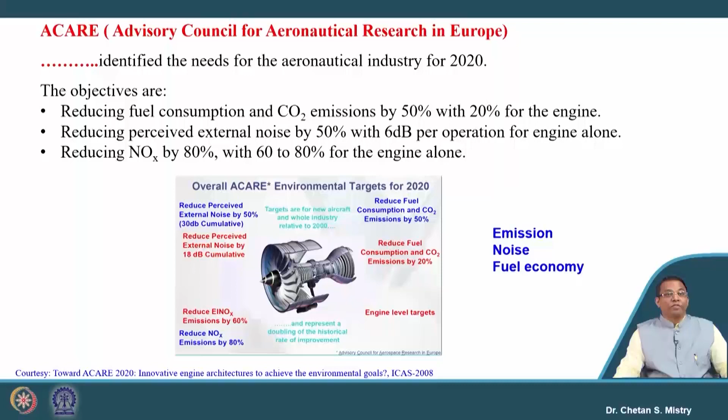We are discussing recent advances in turbofan engines. In the last lecture we were discussing the guidelines given by ACARE in order to meet the requirements in terms of reduction of fuel consumption, reduction of noise, and reduction of NOx emission. The major concerns we were discussing were related to weight, drag, specific fuel consumption, speed, cost, noise, emission, reliability, and safety when discussing gas turbine engine application to aircraft.

Later on, we realized we needed improvement of thermal efficiency and propulsive efficiency because we were concerned about specific fuel consumption. We discussed different approaches to meet that requirement, where we can improve thermal efficiency by improving component efficiency or turbine entry temperature. In order to improve propulsive efficiency, we can address the bypass ratio. We have not yet been concerned with noise and emissions regulation.

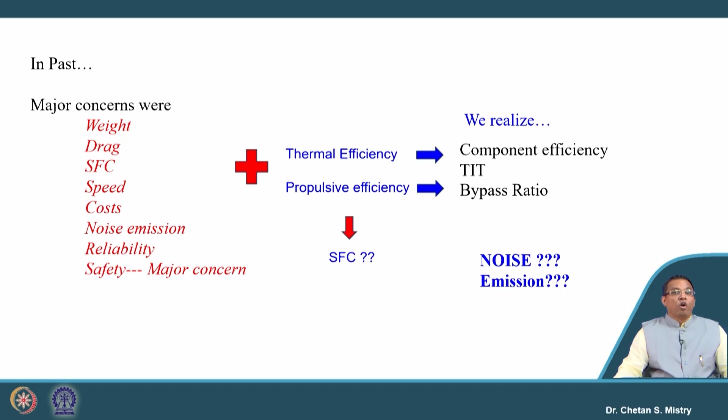There are a lot of companies in US, Europe, and Russia working on development and research activity for engines. Similarly, in the Asian continent, India, China, South Korea, and Japan are working on engine development. But most of the engines we look at are mainly from Western countries, who are investing a lot in terms of time, money, resources, and experience. Let us focus on what projects they are executing to address the issues and meet the requirements given by ACARE.

One such project is the VITAL project, the Environmentally Friendly Aero Engine. This is with the European continent, where SNECMA, Rolls-Royce, MTU, Avio, Volvo, Techspace, ITP, Rolls-Royce Deutschland, and Airbus were all involved. In total there are 52 partners, including university people in this development activity, and 14 European countries like those from Romania, and also CIAM, Russia, were involved in this activity.

This VITAL project is mainly focused on the low pressure part and its installation. So if we look at engine by engine, this project is mainly targeting the low pressure configuration: the fan, the LP compressor or booster compressor, and the LP turbine.

So what they want to do is develop new technologies. First is a new fan concept with the design of two types of fans: counter rotating configuration and lightweight fans. New booster technology is needed because they are looking for high loading with low speed and high speed associated aerodynamics, and developing new lightweight materials. When we reduce the number of stages for the booster, that leads to improved engine weight, which reflects in specific fuel consumption.

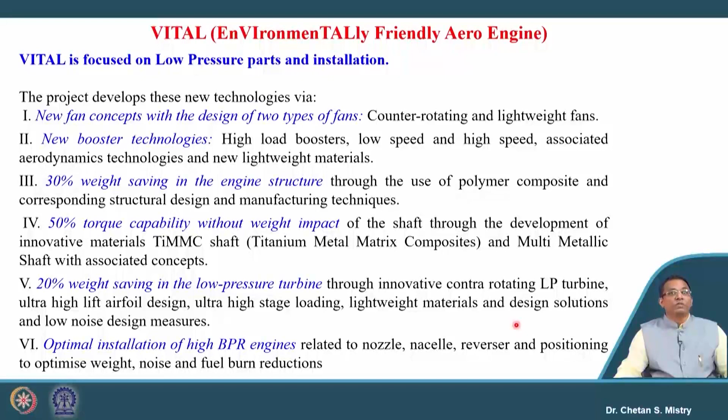Similarly, optimal installation of high bypass ratio engines is related to the nozzle, nacelle, thrust reversal, and positioning of the engine, with optimization in terms of weight, noise, and fuel burn. So this project has many objectives, involving many industries and universities. Let us look at what all they have targeted.

For this project they have targeted three kinds of configurations: direct drive turbofan architecture, geared turbofan architecture, and counter rotating turbofan architecture. The first is related to a ducted fan that is driven by the LP turbine. In the second configuration, the geared turbofan engine, a gearbox is used in order to reduce the rotational speed of the fan.

That is what will be driven by the LP turbine, and we have seen the advantages of using this kind of configuration and the challenges in designing the LP turbines. The third configuration they have targeted is the counter rotating configuration, that is the 3-spool configuration. Here if we look at, this is representing my HP spool.

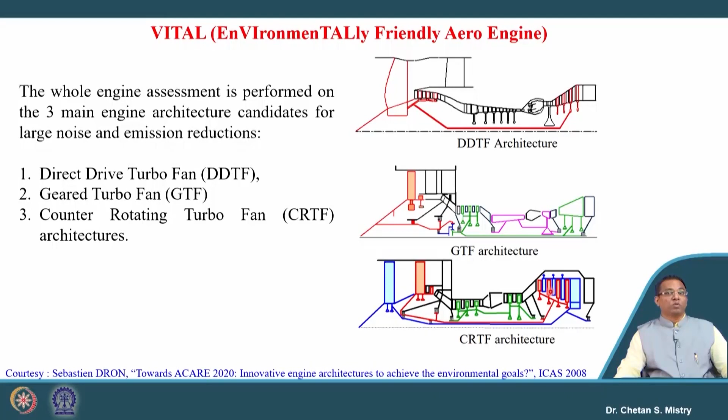In this configuration we are having counter rotating for both the fan as well as the turbine. Let us look at what all they have targeted with. This is the conventional standard turbofan engine, and they want to have two kinds of research for the counter rotating configuration, design 1 and design 2.

For design 1 they want to have the same fuel burn as the standard turbofan engine, but they want to reduce the noise. For this project, CIAM Russia and DLR are involved, and this project, as we say, is the Vital project. Parallelly, they have executed another project with a design configuration where they want to reduce the fuel burn as well as reduce the noise.

In order to address this, the project is named the Dream project. So you can see here, by having this kind of configuration, they want to move towards a reduction of noise, and for that configuration the dimensions are the same as the conventional engine.

Now, if we are looking for this kind of engine architecture with low speed fans, we are looking for load sharing between these two rotors which will be rotating in opposite directions. Then we are looking for a fan diameter that will be lower compared to our conventional engine. The target is also to reduce the noise, which gives the benefit in terms of thrust to weight ratio being as high as possible.

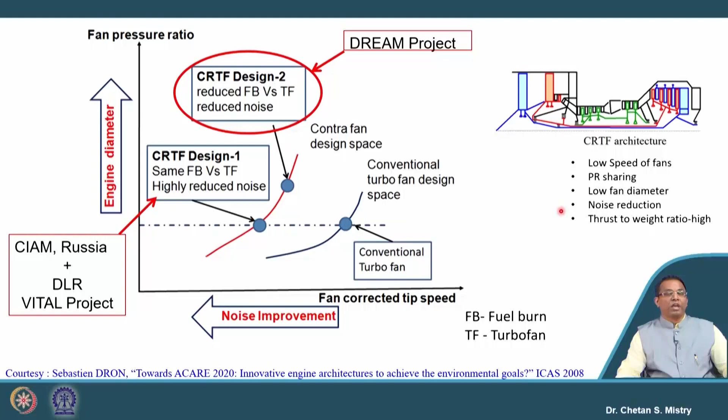Let us look at what all they have done. So these are the 4 research fans. First, that has been developed by SNECMA and CIAM, named CRTF1.

Second, if you look at, this is the single rotor fan developed by SNECMA France. This configuration has been developed by DLR in Germany, and this is the one individually developed by CIAM Russia.

The whole target for doing this research is improvement of performance. Secondly, it is to improve the specific fuel consumption, and the main target is related to noise. Finally, the outcome of the project shows they were able to reduce the noise using the SNECMA CIAM project, and this kind of configuration helped minimize the noise level. At the same time, if we compare the other configurations, they are comparatively noisier.

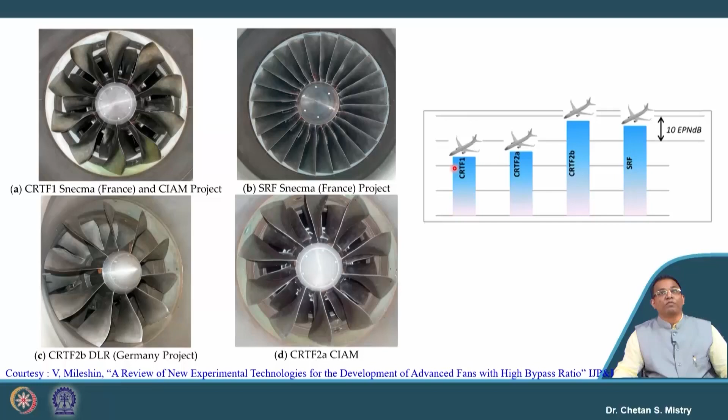Now, this research gave the idea for future engine development. Later on, realizing the potential of this counter rotating turbofan engine, they executed one more project, called the Cobra project, where COMOTI, ONERA, Safran and CIAM together explored the possibility. They implemented this counter rotating configuration for the ultra high bypass ratio ducted fan, and the application they targeted is short and medium range aircraft.

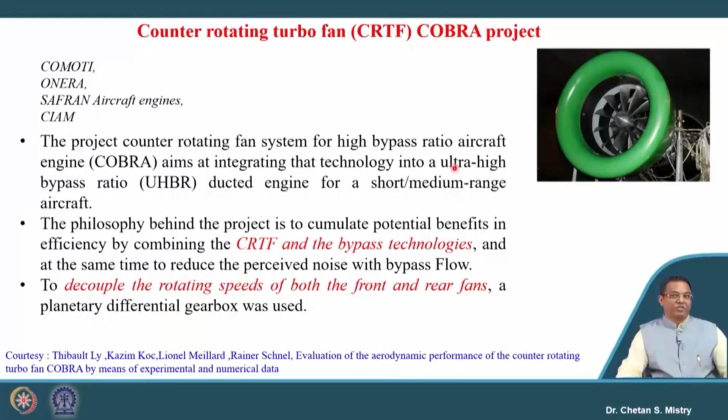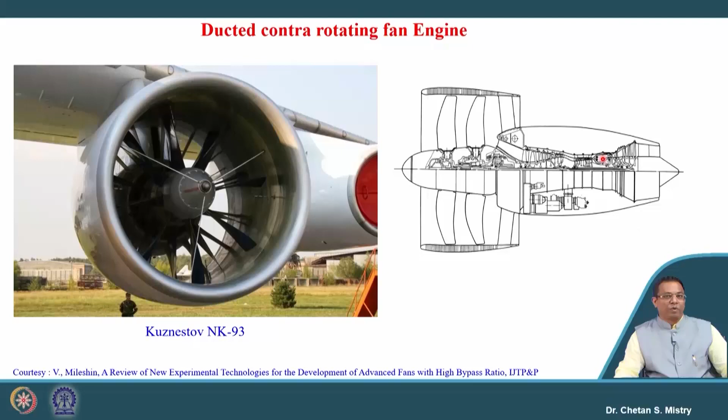Now let us look at the benefits of using this ducted counter rotating fan. Basically the target is to increase the thrust. Here, since we are sucking the air from the front rotor, suppose it is rotating in the clockwise direction, then the other rotor will be rotating in the counterclockwise direction, and that will increase the energy extraction of the incoming air.

If we compare with a single rotor, it is higher compared to our single rotor configuration for similar size as well as power configuration. And when we have this incoming air capacity or sucking capacity to be higher, that is what will lead to improved thrust. Secondly, it will improve the efficiency, because this configuration gives better utilization of the airflow, and that improves the propulsive efficiency, which leads to improved specific fuel consumption as well as overall efficiency of the engine.

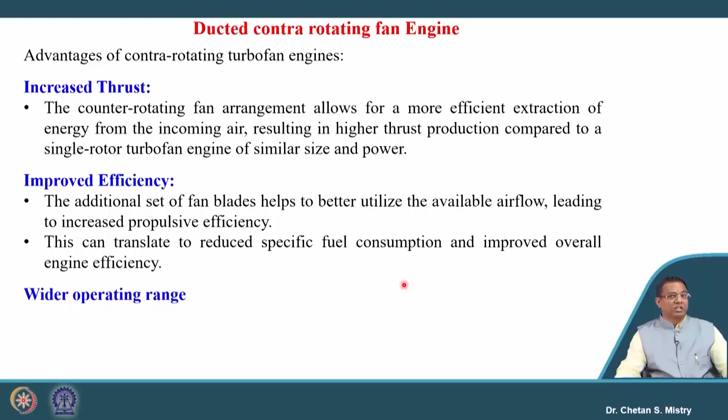Since these two rotors are rotating in opposite directions, that gives benefit in terms of wider operating range compared to our conventional engine, and that has attracted attention towards the ducted counter rotating fan. It also gives benefit in terms of reduction of noise, because these rotors are rotating at lower speed compared to the conventional or traditional fan, and by proper aerodynamic designing of these blades, it is possible to reduce the noise emission.

It saves the weight of the engine, because we are not having additional components like stators to be placed for the LP turbine. So it reduces the number of static components, which helps in improving the weight of the engine, or we can say reduction in the weight of the engine.

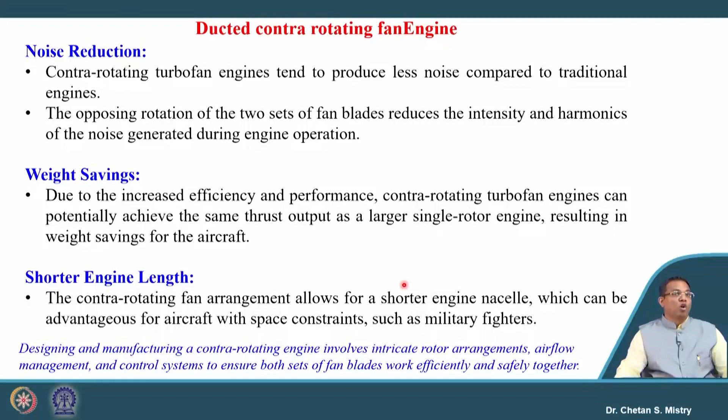Since we are having two rotors rotating at high efficiency and performance for the same thrust configuration, we can have the diameter of these fans to be lower. That is the outcome of this research, and it says we will be having this engine to be shorter, because of this counter rotating arrangement, which gives advantage in terms of application of such configuration for military purpose also.

So we will be having different kinds of configurations. This is one configuration explored by Rolls-Royce, where as you recall in week 9 last lecture, we were discussing using the aft fan configuration. In line with this, we have the aft fan configuration, but this will have counter rotating fans which rotate in opposite directions. At the same time, if you look carefully, these turbines are also counter rotating.

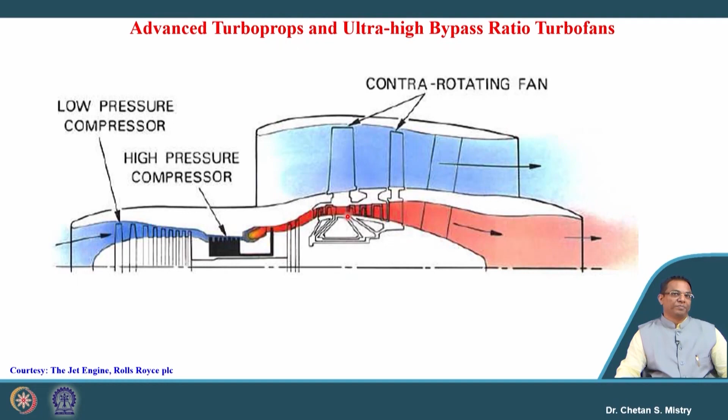So Rolls-Royce are targeting, they are working at this moment towards development of such ultra high bypass ratio turbofan engines or advanced turboprop engines.

In this case, this represents a wide body aircraft, where we have huge passenger carrying capacity, and in order to maintain the lift to drag ratio, we cannot accommodate such engines below the wing. For this kind of configuration, we need to accommodate our engines on the rear side, like this. And if we use this kind of engine with the contra rotating configuration, it puts an additional benefit in terms of 30% reduction of fuel, and it says this will be the future coming engine.

So you can understand here the ducted contra rotating fan is getting attraction towards use for future configurations.

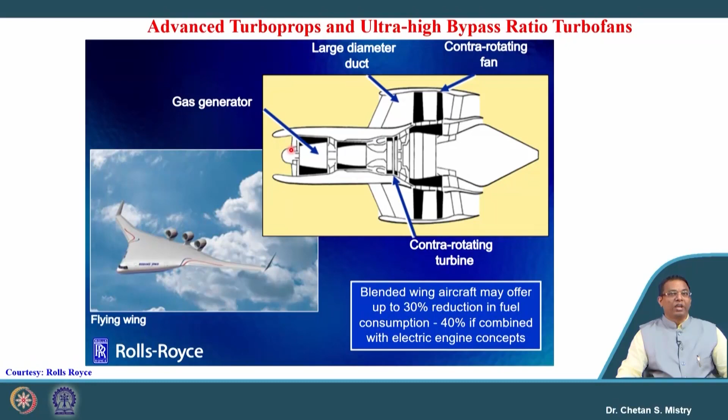Now, parallelly, people are also focusing on fuel burn as well as CO2 emission. Here, if we look at the LEAP 56 engine, that is what meets all the requirements targeted by ACARE, and that is the reason why it has been taken as a reference here.

As we discussed, people are targeting improvement of specific fuel consumption, and the target here is to reduce fuel economy by 20%. It says the success rate of these projects is still moving towards, under this configuration. Parallelly, there was a thought process in the 80s related with the open rotor configuration.

So GE did their work in the 80s to develop the contra rotating open rotor configuration. That was a time when there was an issue with fuel price that had raised a lot, and in order to meet that requirement, they started doing research and development activity, and they came up with this engine.

I will show you the details, and it says it is able to meet the requirement of fuel economy in terms of 20% reduction. You can understand here we are talking about an ongoing project, and at the same time this is already meeting with whatever requirement we are looking for.

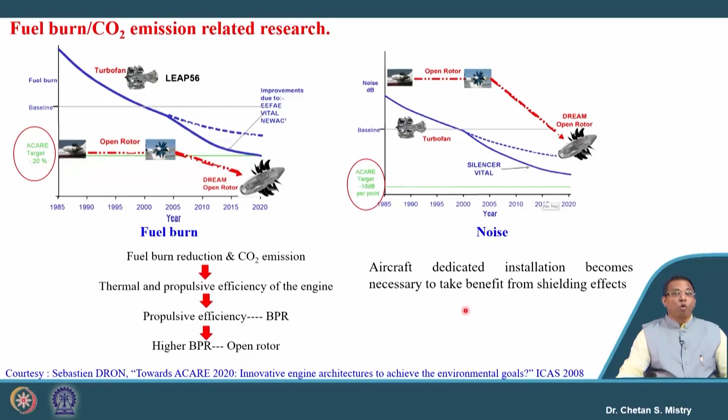So parallelly the world has started thinking in terms of development of open rotor kind of configuration. We have high bypass ratio engine, geared turbofan engine, ultra high bypass ratio engine, contra rotating ducted kind of configuration, and now people have started thinking in terms of open rotor configuration. So let us look at what all are the developments.

During the 70s and 80s the contra rotating open rotor configuration came. The very first trial was done by GE, that engine is GE-36, having a pusher kind of configuration with direct drive. This project was in collaboration with GE, NASA and SNECMA, and they did their testing for McDonnell Douglas MD-80 as well as for Boeing 727.

Later on, that was developed by Pratt & Whitney Allison, engine 578. It has a pusher kind of configuration, but with a geared contra-rotating open rotor. That was developed by Pratt & Whitney Allison and NASA, and it has flown for MD-80.

In parallel, there was a development activity going on in Russia, the D-236 and D-27, which has a puller geared contra-rotating open rotor configuration. It is still in use for the Antonov AN-70.

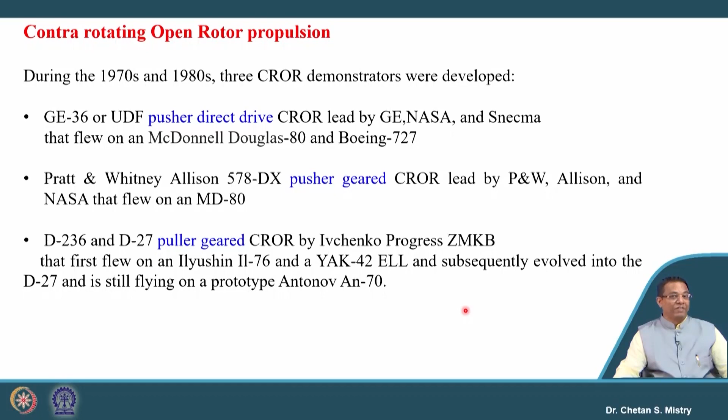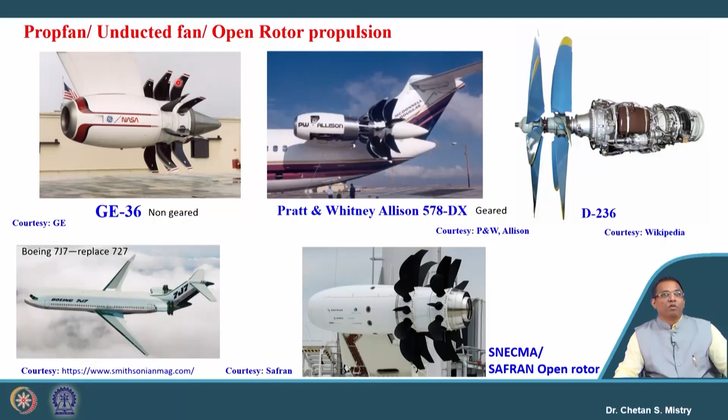This engine has two rotors rotating in opposite directions. The wake coming out from the front rotor itself generates noise, and that wake is sucked in by the rear rotor rotating in the opposite direction. Because of this cutting of the wake, it generates a lot of noise. SNECMA claims they are able to manage this wake cutting and control the noise.

These are the different configurations they have explored: a contra-rotating configuration with direct drive, then a rear gear drive, a front drive, and they have also tried a single propeller. If you look at the cut section of this engine, on the rear side they have a gearbox that rotates the rotor as per requirement. Our requirement here is in terms of flying at Mach 0.78 or maybe 0.8.

Now let me discuss the turboprop engines we are talking about. They are not made for flying at this Mach number. At most they can fly at Mach 0.4 or 0.45, because they have their own limitations, and those limitations, those barriers, are being crossed by this open rotor configuration.

When we go with a front gear configuration and a single gear configuration, it gives benefit both in terms of weight as well as noise.

Let us look at what people started thinking about in order to meet the requirements of ICAO. We were moving towards using high bypass ratio engines. Later on, in order to reduce noise emission, they went with a counter-rotating, very high bypass ratio configuration, where fuel burn improved and noise emission also reduced.

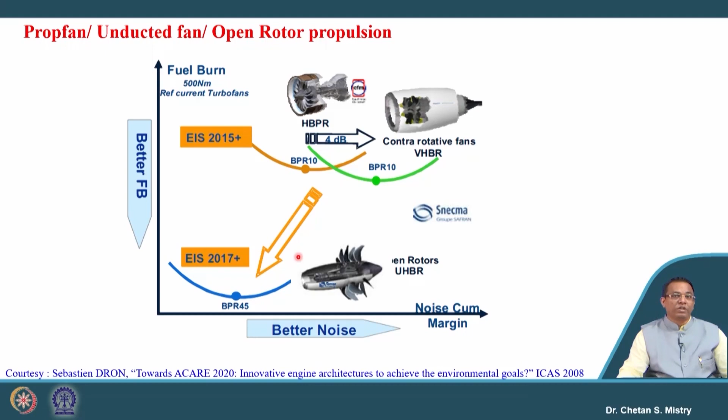Now the new target has come with a bypass ratio of 45, which gives great benefit in terms of fuel burn, but at the same time noise is the issue, and people are addressing this issue with different kinds of engine configurations.

These are the configurations being explored by Rolls-Royce in line with what we discussed earlier. In this case, they have gone with a pusher kind of configuration with a gearbox, and this represents a puller kind of configuration, in which these two propellers or prop fans are placed on the rear side. They are also exploring the challenges in terms of placement of these engines.

This pusher type of configuration can be placed below the wing. When we discuss the puller kind of configuration, that needs to be installed, if we look here, on the upside of the engine, basically on the fuselage, with the target of addressing how the flow aerodynamics will be affected. So placement of such an engine is also very challenging.

This kind of configuration has so many challenges, which are basically segregated in two ways: at the aircraft level and at the engine level. Let us look at the problems or challenges at the aircraft level. It says noise emission - we have cabin and community noise, which is a big issue.

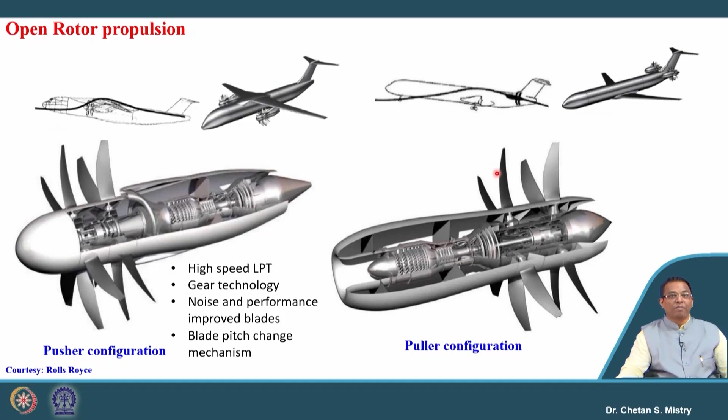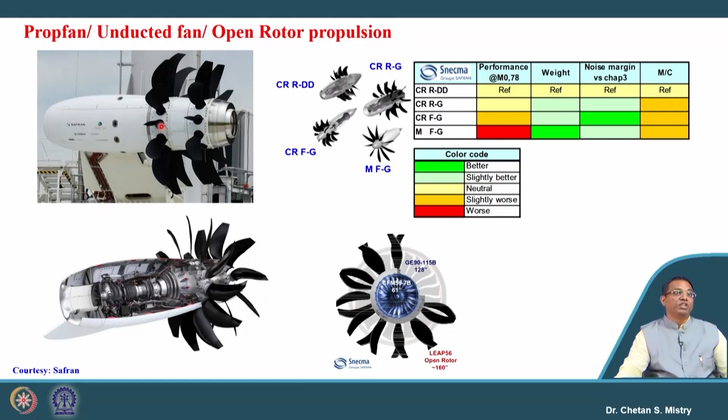What we are discussing about the mechanical design of pitch control - we will see what all is meant by pitch. If you look at these rotors, what we are discussing for the prop fans, they can change their orientation as per the operation, as per the requirement. That is what is called variable pitch kind of configuration. And when it is rotating, under rotating condition, you need to actuate that mechanism, and that needs to work - it is very challenging.

At the same time, we are having gearbox reliability. We have discussed this aspect when we were discussing about the geared turbofan engine, the oil cooling requirement, maintainability and acceptable maintenance cost. At the same time, we are having contra rotating turbines where we are looking for sealing and blade containment. They are all very challenging aspects.

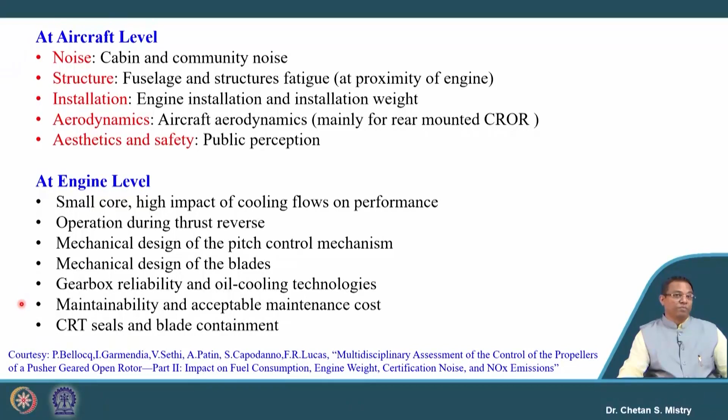So currently all these engine manufacturing companies, those who are working with the design and development of such open rotor configuration, they are trying to address all these issues. So in the very near future, people are claiming that by 2035 this kind of open, unducted kind of configuration will be in use for medium range aircrafts.

There is one more project that is going on in parallel, called the RISE project. It has major attraction these days. If you look at the media, everywhere we have this project, it is coming in the limelight. This project is in collaboration between GE Aerospace and Safran, and the whole target is to reduce fuel consumption and CO2 emission.

This RISE project has a variable pitch configuration with a single stage, and it is also having a single stage or stationary outlet guide vane.

Now, this has initiated from the project called QCSEE - Quiet Clean Short Haul Experimental Engine - and that is what has helped in order to develop this kind of configuration. So the concept of composite fan blade they developed for GE36 is what is being used for GE90 as well as for the LEAP engine. The same concept has been used for the development of the blade for this RISE engine.

And Safran has taken the same configuration in this case, and they say they are able to reduce the noise to a level equivalent to the LEAP engine. And that is with the project called EU Clean Sky Research Project.

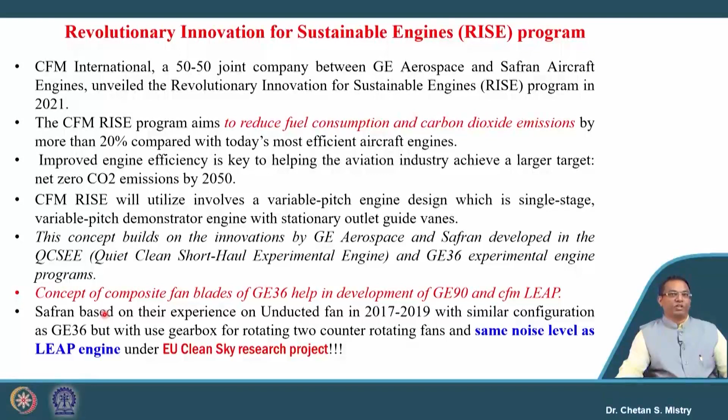Now here in this case, as we have discussed, the contra rotating unducted fan was developed by GE in the 80s. They have not stopped at research and development activity. They were trying to identify the source of noise, and gradually they have come up with a solution for the reduction of this noise.

And that is with Avio Aero, in terms of the project called Clean Sky Program, called IRON with Leonardo.

Now the configuration we are discussing for the RISE project is a single unducted fan. What is the whole idea? It has the simplicity of a turboprop. We are having a single rotor, with the incorporation of a fixed de-swirl stage. Same way, it is a single stage variable pitch fan blade that is rotated in the front, and on the rear side we are having an outlet guide vane. It is not having any complex contra rotating gearbox kind of configuration.

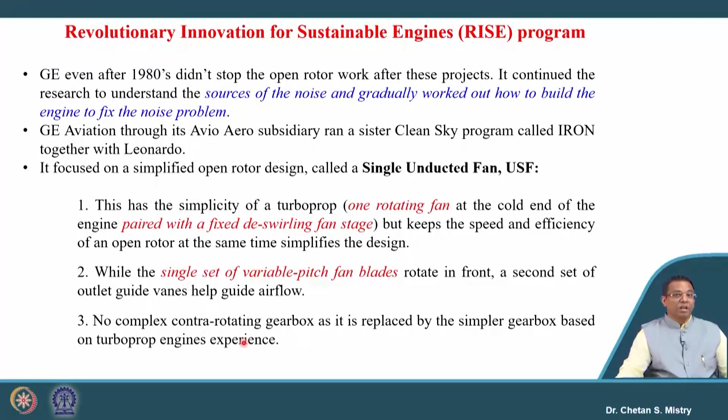So this is what makes this engine simpler compared to everything we've discussed in terms of turboprop engines. Let us see how it looks like.

Now this engine has to cope with the expectation of flying at a Mach number around 0.8, similar to our turbofan engine. It needs to show improvement in efficiency, and the noise level also needs to be met. Maybe it needs to change in diameter. At this moment we will see what dimensions these people are talking about, and at the same time, how it will be installed on the aircraft.

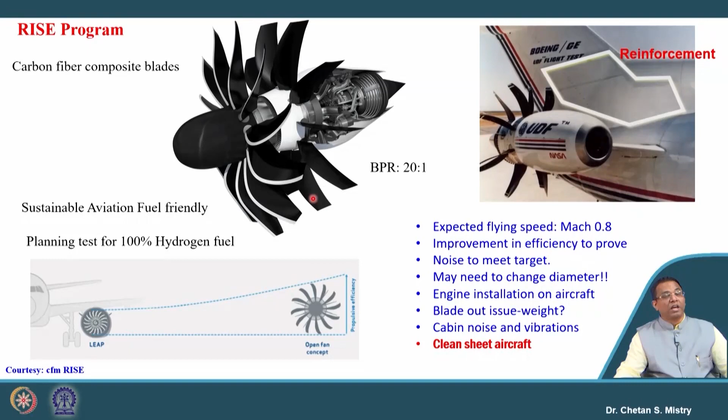Currently this engine has a bypass ratio of around 20:1, and they want to test this engine with 100% hydrogen fuel in the very near future.

Now if we look at this, it represents what we are discussing at this moment. It says for the past two decades, globally people have done a lot of research and development activity for commercial aircraft, targeting fuel economy, emissions, and noise. If we look at this, it represents the turbofan engine.

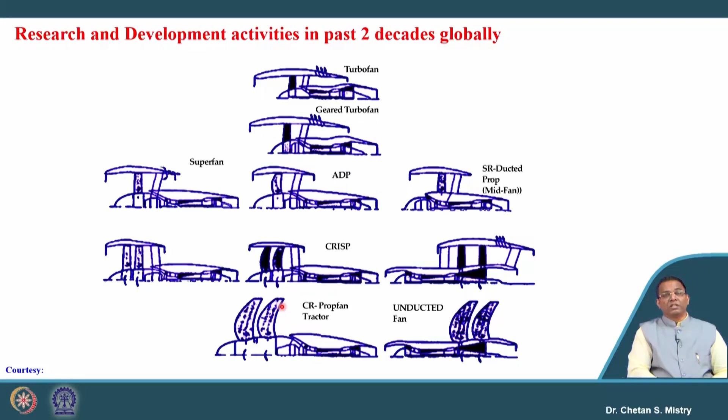Later on people moved to the geared turbofan engine, then they discussed the advanced ducted propeller, then other configurations where propellers are installed with super fan kind of configuration. This represents the ducted contra-rotating configuration. Later we were discussing the contra-rotating prop fans and unducted fans. So you can imagine this is a representation of everything we are discussing in terms of meeting the requirement.

That is what has been forced by ACARE as Vision 2020.

So here we are stopping the discussion on development activities for commercial aircraft and the ongoing projects. In the next lecture we will also discuss the ongoing projects, and later we will target military engines also, because those engines are equally important.

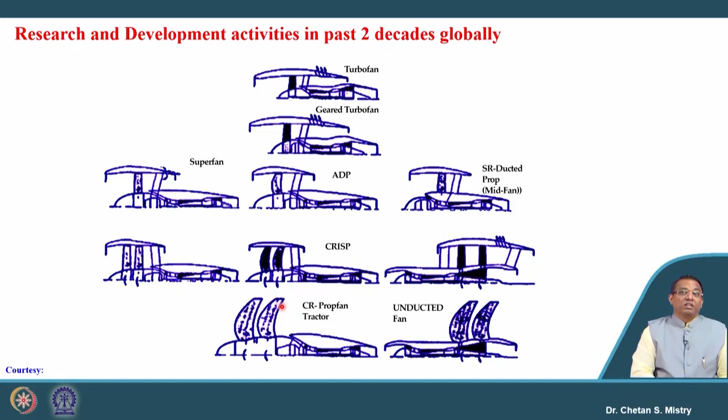What we are discussing at this moment, in terms of fuel economy, noise emission, and CO2 or NOx emission, will also be equally applicable for future engines. We will also discuss something in terms of what people started talking about regarding hybrid engines. So stay with us, we will continue discussing all these engines.